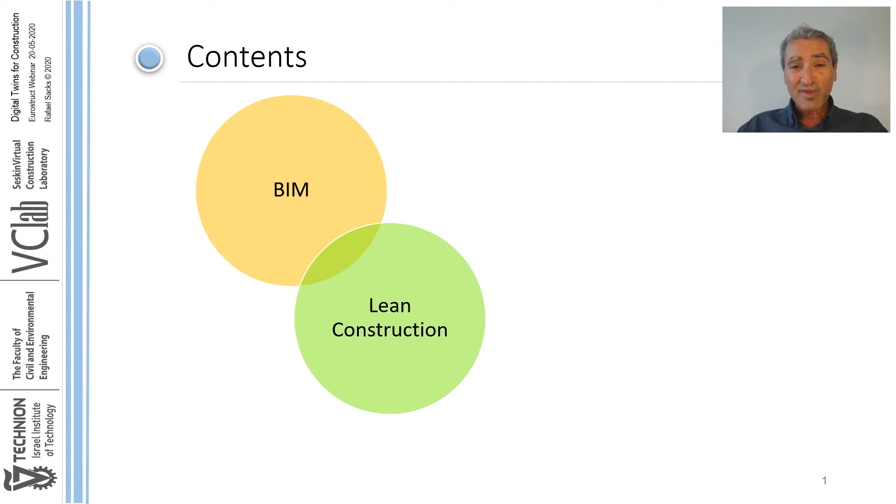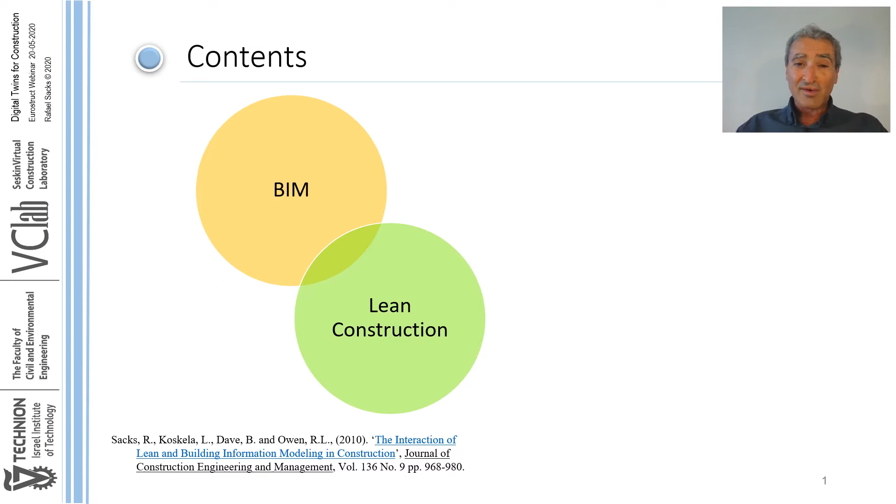BIM and lean construction are both radical changes in the construction industry. I think most of us are very familiar with these two themes. Certainly, we have written about them in the past, many of us, and they feature in much of our research. But there are two other interesting developments in the construction industry, a very big growth in monitoring technologies and in the AI that supports them, and their application to collecting data from construction sites.

And we also are witness in other industries to the appearance of digital twins, a new way of not only monitoring, but also controlling and managing assets in the built environment.

So what is a digital twin for those of us for whom the term is new? A digital twin is a computer-based replica of a real physical asset. That could be a building, it could be a train carriage, as it is in this case. And there are some key features of how this digital twin construct works.

The physical twin is monitored by various sensors, cameras, etc., and they provide a stream of data to the digital twin. That information is interpreted, merged, converted into information that can be used to gain insights about the real physical asset. And on the basis of those insights, we can create simulations or analyses into the future to make decisions, smart decisions about how we will manage that asset.

And in many cases, through telemetry and other means, we can actually implement those decisions in the physical twin in the real world by controlling it from the digital one.

So it's a fairly natural step, as you can imagine, to apply digital twin ideas to the fixed infrastructure, to bridges like we see over here. But what I want to talk with you today is about the idea of applying digital twins to construction sites during the construction itself, before the assets are delivered and operational. And of course, we have both with assets and with construction sites, the physical and the virtual aspect.

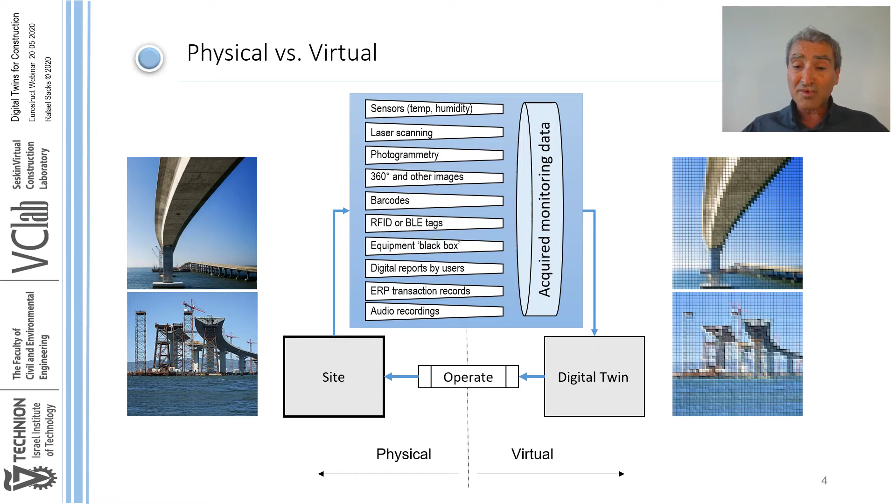So how do we go about monitoring the construction sites? Well, we have an array of technologies that range from sensors through laser scanning, 360-degree images, and others. Just a few examples I'm showing here.

Sensors placed in concrete to monitor their temperature as the concrete cures. 360-degree cameras, which are used to collect images of construction site every day, mounted on the helmet of a construction worker, and those are then interpreted using computer vision and can be compared to BIM models.

Laser scanning of industrial facilities or of construction sites, which requires a great deal of AI to determine what we're sensing in those images. Or even, as you see here at the bottom, handheld reporting through mobile devices by construction workers.

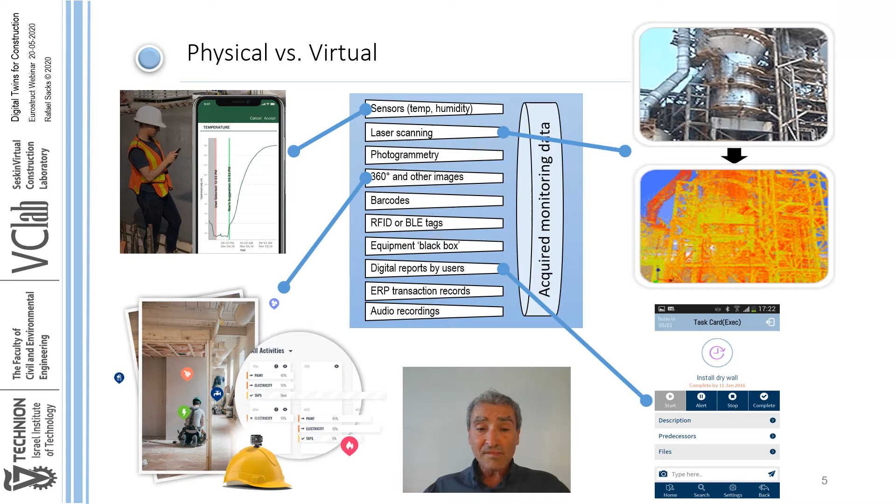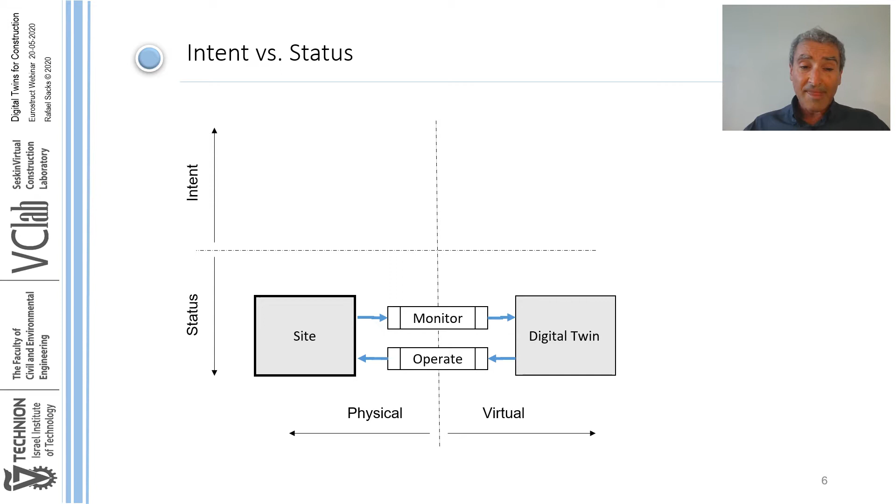Think not only about the fact that we have a physical and a virtual dichotomy in the information, but we also have a dichotomy between information that represents status and information that represents intent in a construction project. So, for example, if we think about these before and after types of information, and we split them into physical and virtual on these two axes, then we can begin with what we call the project intent information, which is generally compiled in a BIM model and perhaps in construction plans.

We undertake the activity of designing and planning to compile that information, and then we use that information to build, essentially to control the production of building on site in the physical world. The intent drives the physical reality. So we measure here, or we have the status of the physical world.

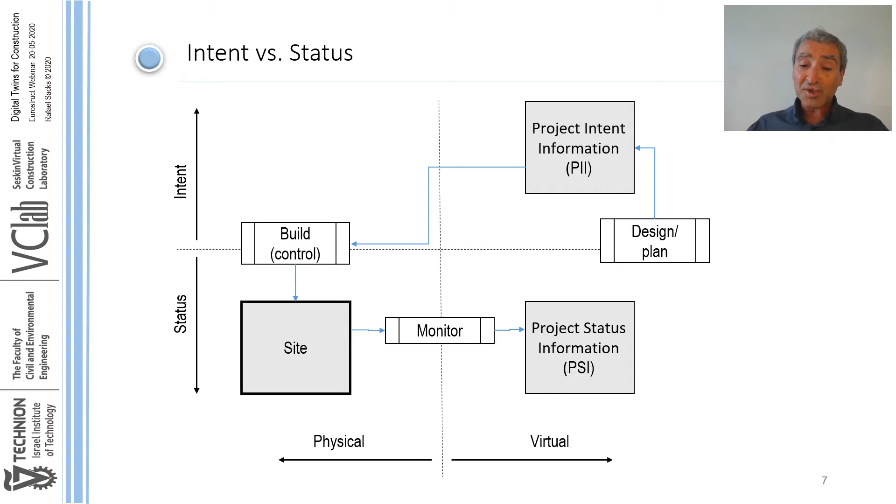We then monitor the status of the physical world to create virtual project status information. And of course, we can then compare the project intent to the project status to determine our progress and the degree that we are satisfying the requirements.

In another step, we're also able to operate from the status or from the intent into the site itself. You can also imagine that if we were to create a physical model of a building from cardboard or something similar, that would fit here in the quadrant of intent in the physical world, where we represent what we intend to do, but we have a physical manifestation of that information.

Now, the information can be of three types. It's physical or factual information as reality, which is actually what we have in the construction site. It's information that is manifested in the real world.

We also have information that is instructional, the project information, intent information, where we determine what we wish to do in the real world. And then we have the semantic representations in the project status information of what we monitored in the real world on the site.

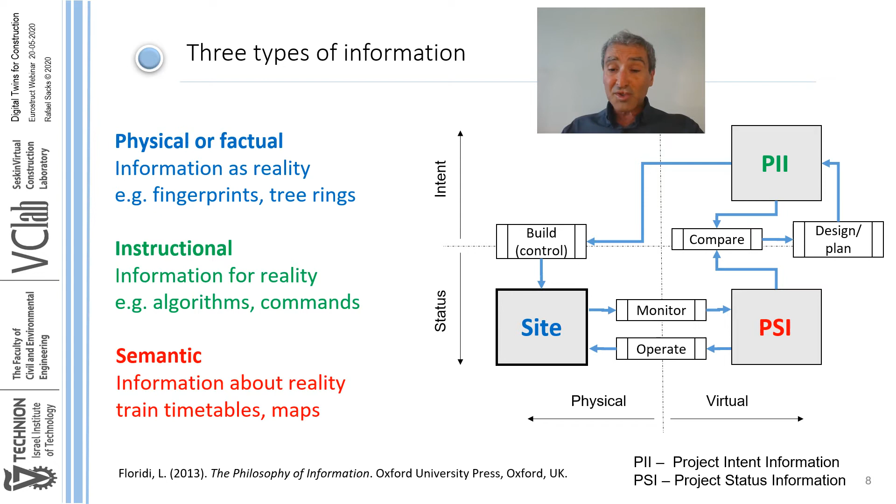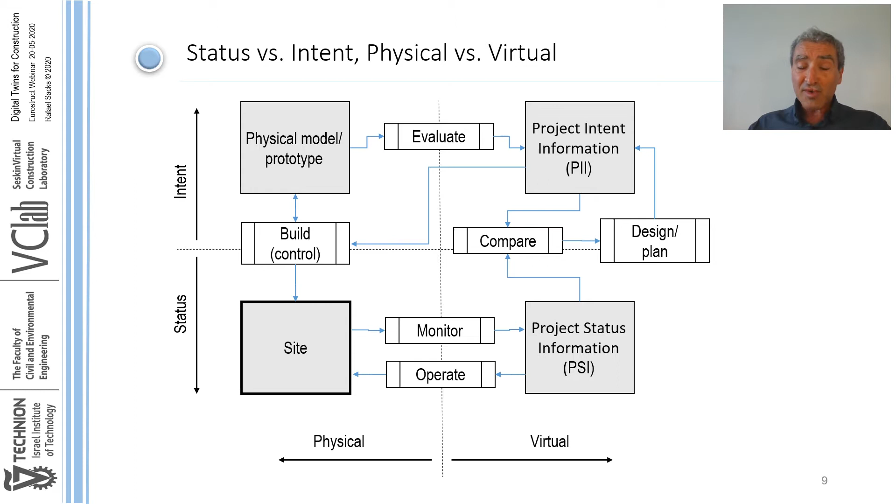So we have status versus intent axis, we have physical versus virtual axis, but with the background that we all have in lean construction, we can recognize that we have a third axis, and that third axis is the axis of product versus process.

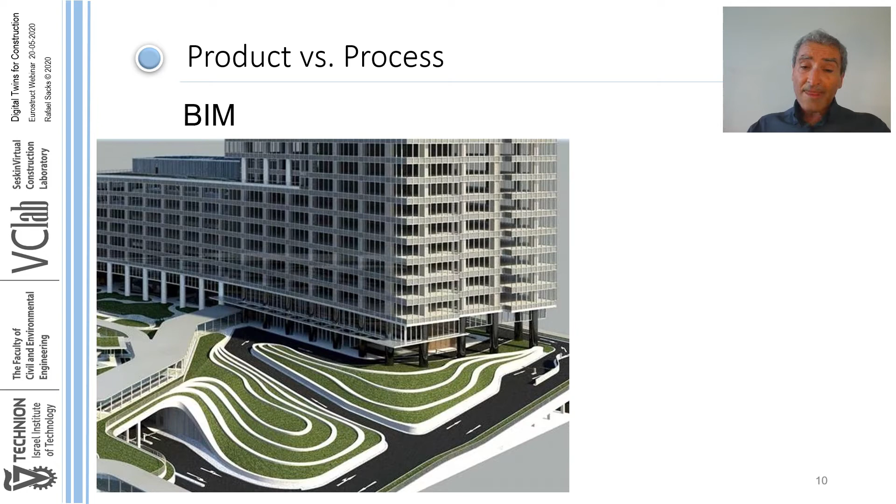If I show you the BIM model for a moment for this project, a commercial building in Singapore, then it's quite easy for us to imagine that we also have a representation of the process. Now both of these can be virtual or physical as they manifest.

And that means that we can organize our information along three axes, which create 8 quadrants. So we have the building under construction, but we also have the construction process, both of which exist in the physical world. We have the project status information of the as-built, the virtual representation of the building, of the product, but we also have the record of what was done, how long it took, who did it, where they moved, and so on, which is the virtual representation of the process as it was performed.

And sitting here in the background, of course, we have the project intent information, which is what we would generally consider the design information in the BIM, but also the project plan, which is also project intent information, which exists in the virtual process world and represents our intent.

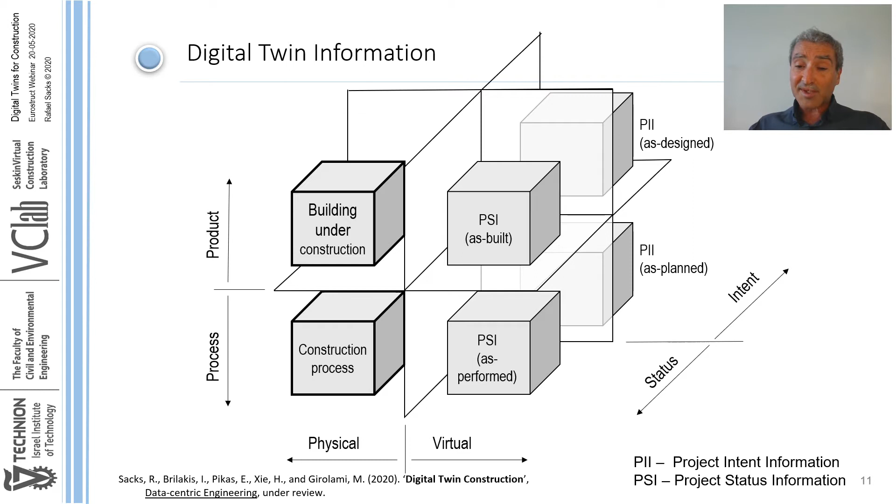We can also think of this information as growing across a life cycle. If we think of the start of conceptual design, designing, planning activities, and then we begin prefabrication, at some point we start construction on site, and we have the construction phase, handover, and operation, we can imagine the information accumulating in this way. As designed and as planned product and process information is compiled in the design activities.

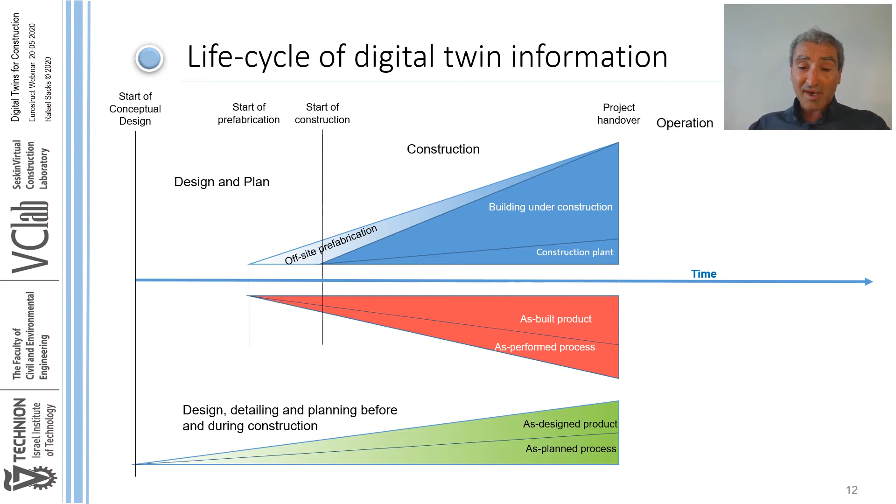In the real world, we actually begin off-site fabrication and then the building under construction. We also have construction plant, and all of these represent information manifested physically. But as we build and we create new products and new realities, we can monitor those things and we compile as-built product and as-performed process information.

Once we go into operation, we accumulate only the information about the building that we need for running and maintaining that asset, but actually we monitor it, and so we continue to accumulate as-maintained and as-renovated product information and the monitoring data.

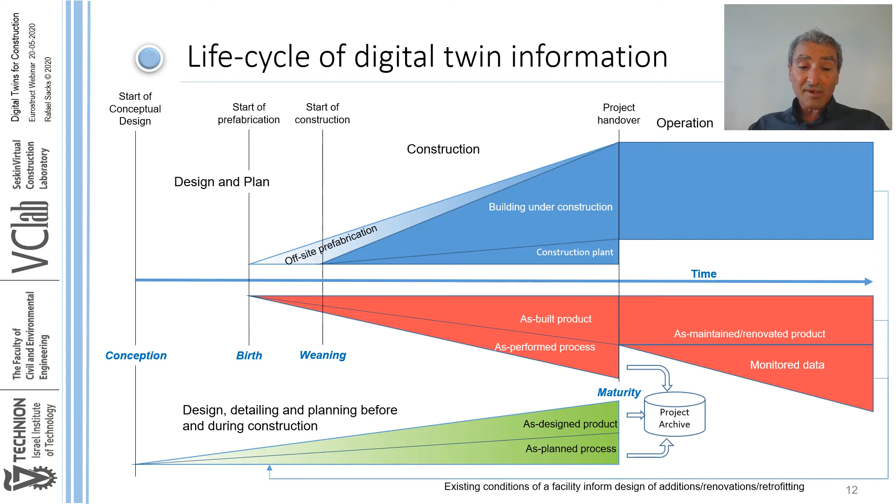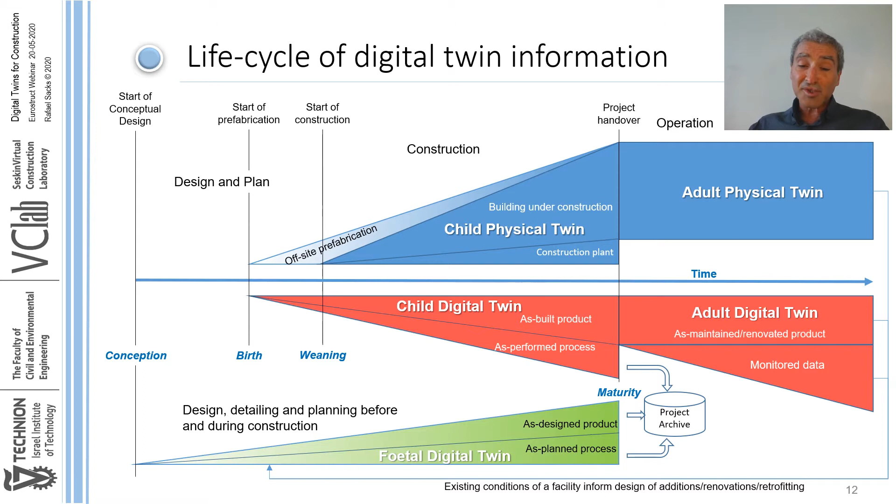If you like, we can take the human twin metaphor a little further, and we can talk about conception, birth, weaning, and maturity, so that we can actually talk about a fetal digital twin, a child digital twin, a child physical twin, and then the adult physical twin and the adult digital twin. In terms of this metaphor, what I'm interested in for the purpose of our lecture today is the fetal digital twin, the child digital twin, and the child physical twin.

Okay, so before we go on to describe what we mean by digital twin construction, we still need to define two more dimensions, that of data, information, and knowledge, and also the lean process dimensions.

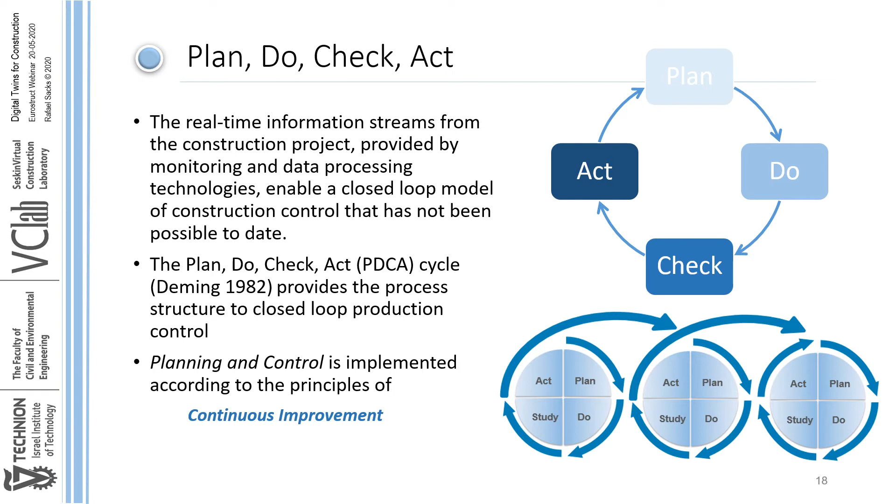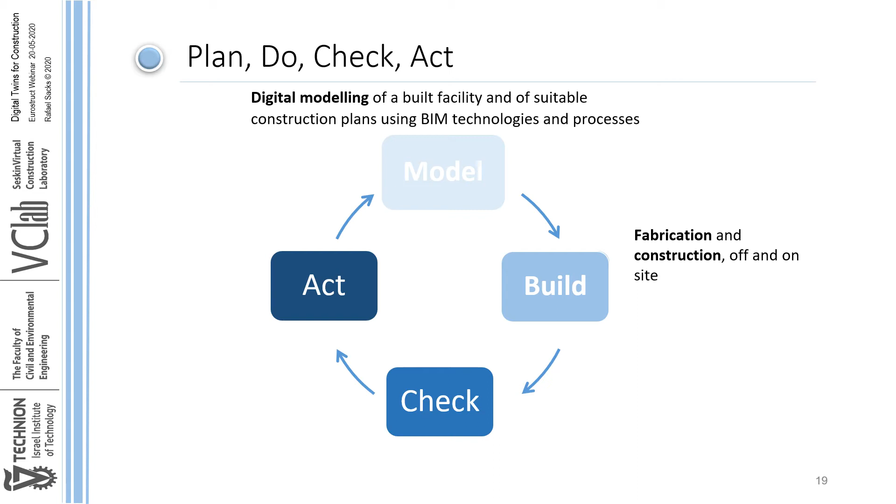So if we consider the plan, do, check, act cycle in this way, then we can consider that modeling of the built facility is the first step, that planning action. The second one is the building itself, fabrication off-site and construction on-site. And then we have this monitoring and interpreting action, where we check what's going on.

So we have digital monitoring of the facility, intelligent interpretation of the data to generate information describing the product and the process status. And finally, we have the evaluate and improve step, where we evaluate product design and process plan alternatives compared to historical and intended situations. Then we can improve the design by changing something in the BIM model going forward, or changing the construction plan. And then those things will actually play out in the construction site as things go ahead.

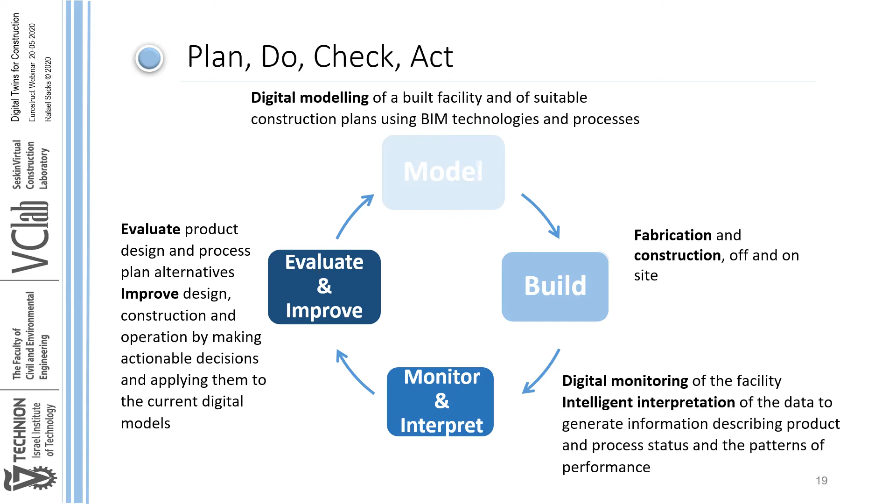And those are our actionable decisions, and they're applied through the digital twin paradigm. So to summarize so far what we've defined in terms of the different dimensions for digital twin construction, we see that we have information dimensions and process dimensions.

In the information dimension, we have virtual versus physical, we have intent versus status, we have product versus process, and we have data, information, and knowledge. And all of those frame the way that we, in the end, define the process and the implementation of digital twin construction.

In the process dimensions, we have the information lifecycle going from the fetal digital twin through the child digital twin and its physical counterpart, and ending up after construction with the adult digital twin. We also have, during construction, the heart of the construction production control, the plan, do, check, act cycle, which in the context of construction we interpret as, or implement as, model, build, monitor and interpret, evaluate and improve.

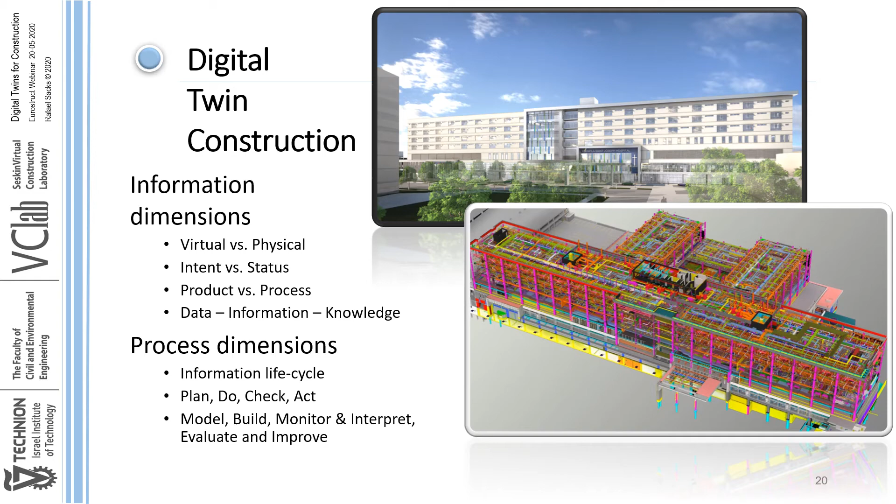And that finally leads us to our model of digital twin construction. As you see in the big picture, we have here on the left the digital twin aspects, and on the right the physical twin. We have the design, product, and the plan process actions.

They feed and create the project intent information. That then builds and guides construction. We result with the physical twin, which proceeds day by day. We monitor it over here.

And then we get raw monitored data. That allows us to create the project status information by interpreting it using complex event processing over here. We can then evaluate conformance by comparing the project status information with the project intent information, and that results in product and process status knowledge, PSK as we've highlighted it.

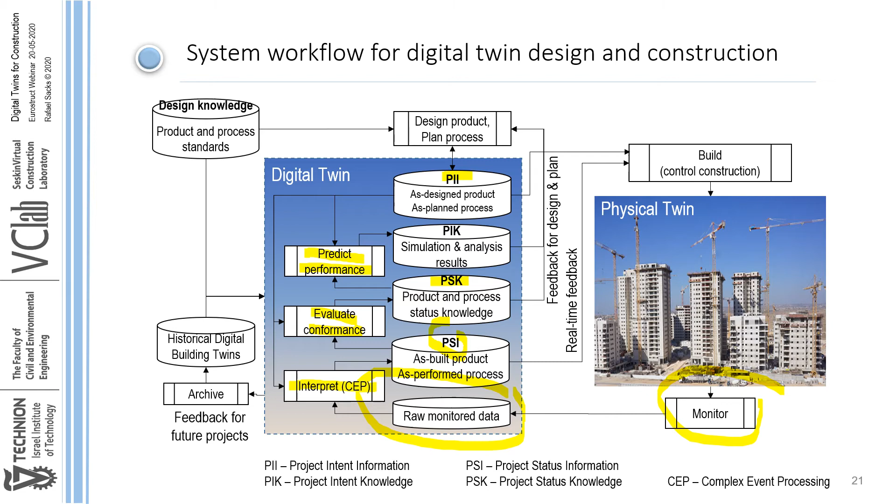We can then use that to predict performance going ahead, using information from historical digital twins that have been archived, using generic design knowledge, product and process standards, and by predicting performance we can then say what we expect to happen. That guides us to improve our design, product, and plan process information, generating a second cycle of project intent information, once again feeding build, control, construction, and so forth, closing our PDCA loops.

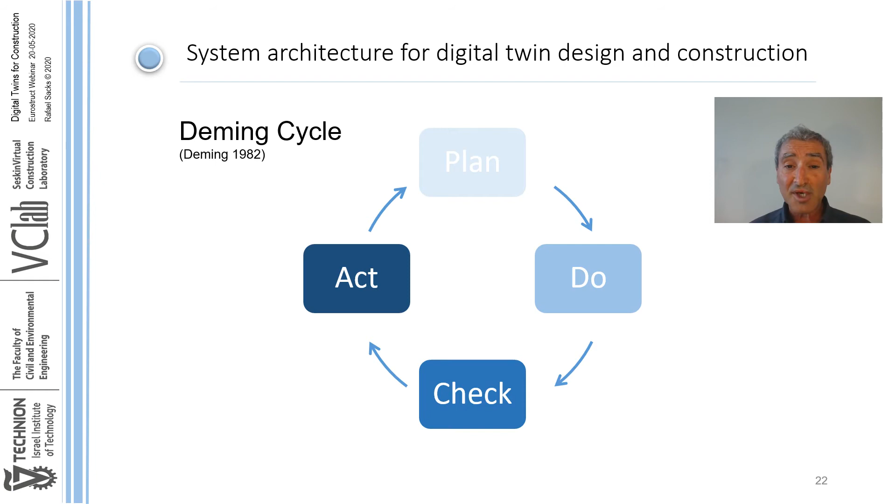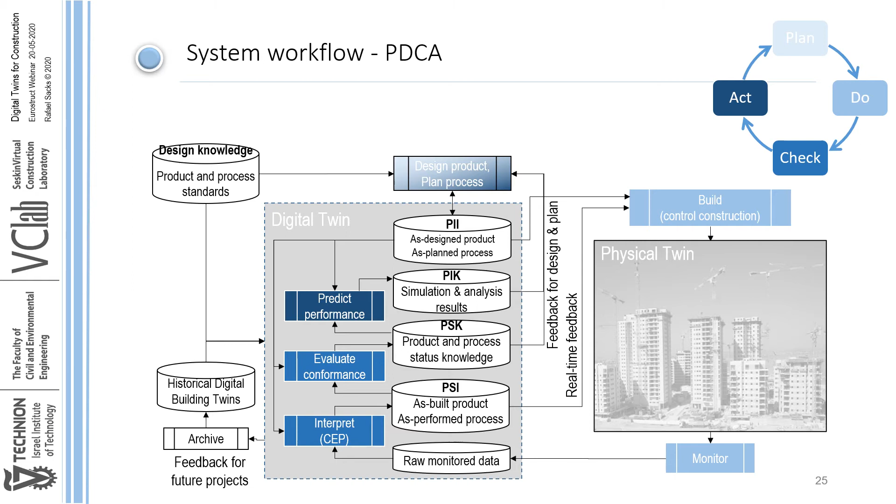If we consider Deming's plan-do-check-act cycle and how that plays out through the digital twin construction cycle, here is what we get: a number of concentric cycles. Using color coding to show how this works, we have a section of plan, design, product, and plan process, then build and control construction, which is our doing. We have our checking, which begins with monitoring but is mostly concerned with interpreting, complex event processing, and evaluating conformance. Finally, we have our action, where we predict performance and repeat the design, product, and plan process to continue the cycle going ahead.

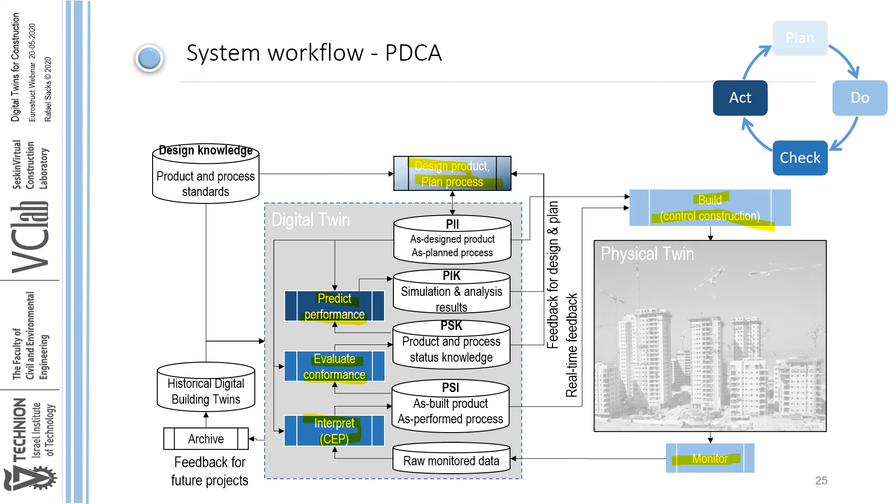Just to elaborate a little on the steps of interpreting and merging, we have down below the various monitoring technologies we spoke about before. We acquire the monitoring data from those technologies, and that information has to be registered and compressed before we can use it. Then this interpret-and-merge section really uses complex event processing.

What we're trying to obtain from that is object geometry, surface textures, the paths that workers took while doing their work, the flow paths of materials and quantities of materials, the paths of equipment, the information flows, and any events reported by people. These different bits of information reflect both product and process, and that allows us to compile the project status model we need before we can go on to generating knowledge.

If I look at the kernel of the digital twin process and compare it with the data-information-knowledge model, we see clearly that we're progressing from raw monitored data through to project status information, and from there to project status knowledge and project intent knowledge, which represents our future-looking prediction of what might happen depending on the decisions we make. That, of course, feeds on and feeds into the project intent information.

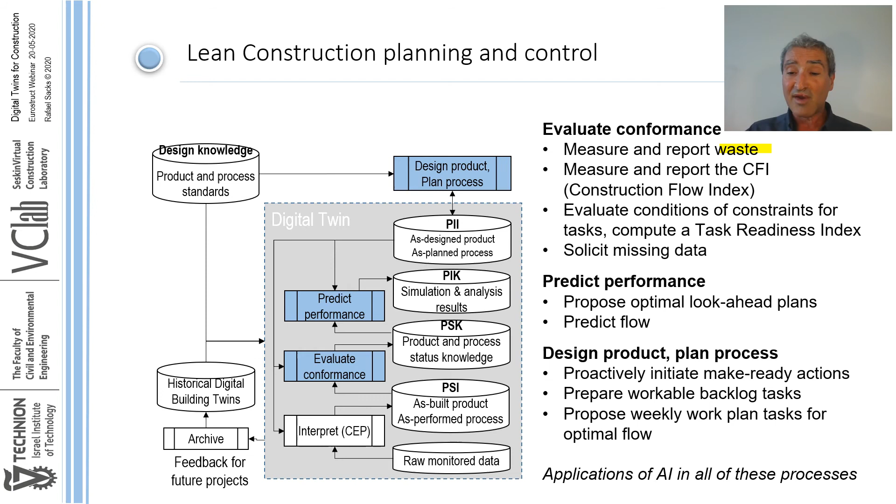So what are we really talking about? I hope I've given you the impression that we're actually talking about a potential future new mode of construction. The title of the talk was Digital Twins for Construction, but I think it might be more accurate to call this digital twin construction. While that doesn't necessarily replace any other labels like lean construction or BIM or anything else, it represents a new way of thinking about how we leverage all of the different components of our thinking to date, to create a slightly more automated, more productive, more cohesive construction system that is able not only to control individual sites much better, but entire portfolios of projects.

So the next step, of course, is to consider the business case. This is very interesting because we see some of these aspects already developing and already in place through construction tech. So we can ask these questions about the data first.

How will monitoring be provided? Well, presumably through service companies. General contractors are very good at outsourcing, and construction tech companies, particularly startups, are very good at innovating with sophisticated technologies. In previous work, we've looked at how those two work together. So it seems fairly feasible that new construction tech savvy startup firms will provide a lot of that monitoring, and indeed many of them already are.

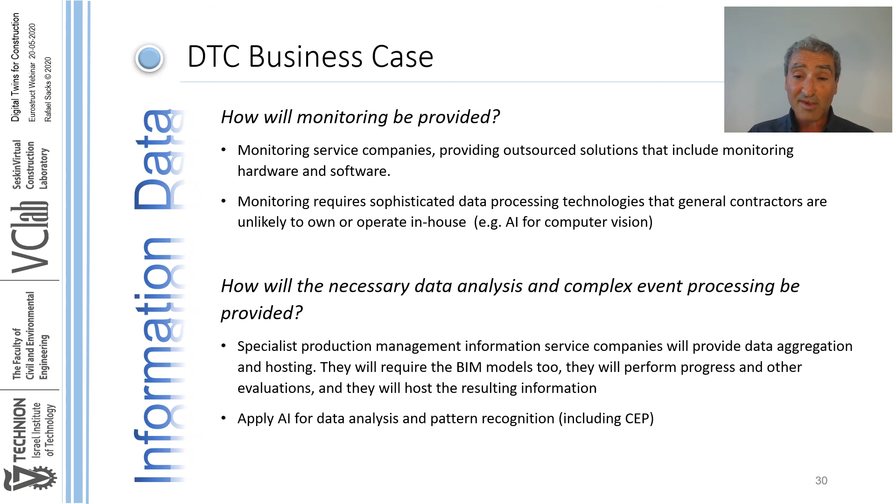In terms of the information, how will the necessary data analysis and complex event processing be provided? Here again, we see already specialist production management information service companies that are trying at this stage on the basis of single sources of monitoring. But in the future, we can imagine they will begin integrating different sources of monitoring so they can provide far more comprehensive complex event processing and, in fact, provide the information that we need. And they will apply various forms of AI for data analysis and pattern recognition.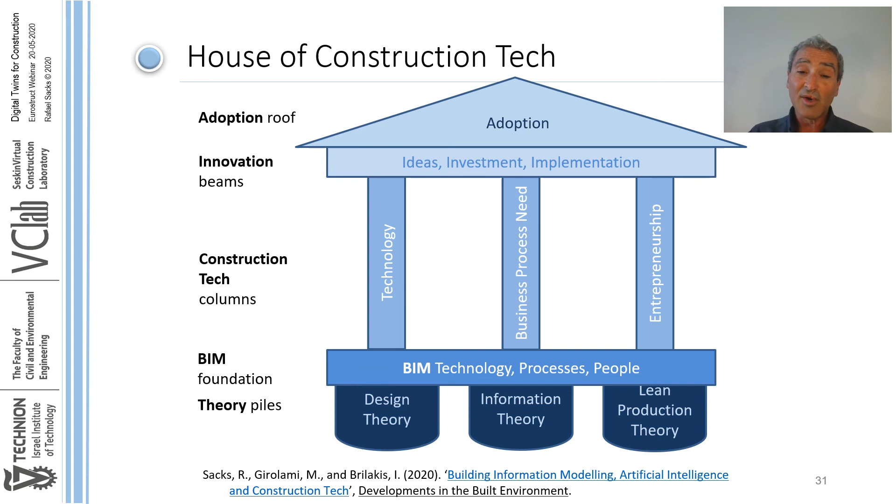We see this in previous work on construction tech, AI, and BIM, recently published in Developments in the Built Environment. I will refer you there to see why I claim with some confidence that construction tech, as a construction application of high tech, will have a big role to play in all of this.

And then in terms of knowledge, we really have, I believe, a digital twin construction business case to be made. So we can ask: who will run the predictive analytics, simulations, etc., and make recommendations about how to proceed with construction? It seems that over time, if there are outsourced specialist information service providers collaborating with construction tech companies providing monitoring data, these production management information services will host the information and knowledge about projects as an outsourced service, using AI for data mining, parametric design, and process optimization. And because they're providing a service online, they're not necessarily constrained to be present on the construction site.

Which leads us to the supposition that we may see in the future digital twin construction control rooms, which would be the site office, perhaps to an extent, perhaps not all of its functions, but many of its current functions might be moved to permanent office spaces that could begin to monitor, control, encourage production control, and indeed cross-project portfolio control of construction from day to day.

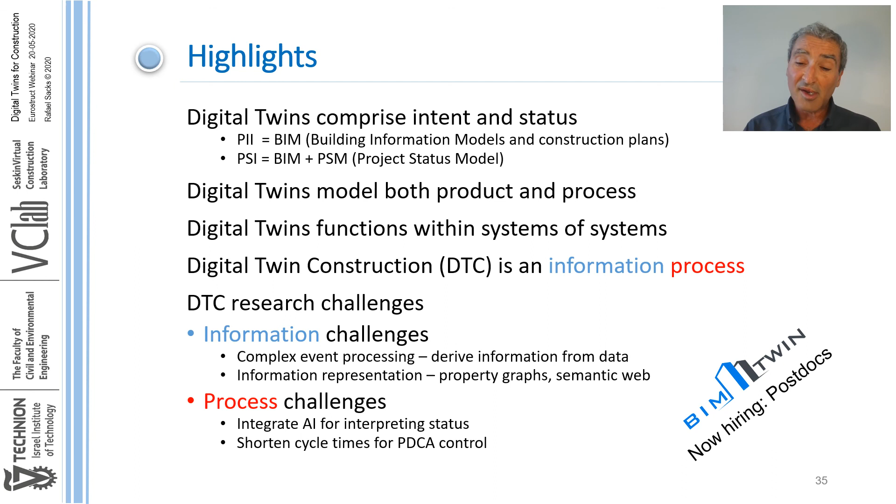I began the talk by raising the thinking innovations that we have on the table today: BIM, lean construction, monitoring technologies, artificial intelligence, and digital twins. I hope that I've managed to argue coherently that these might all come together in something that in the future we may term digital twin construction.